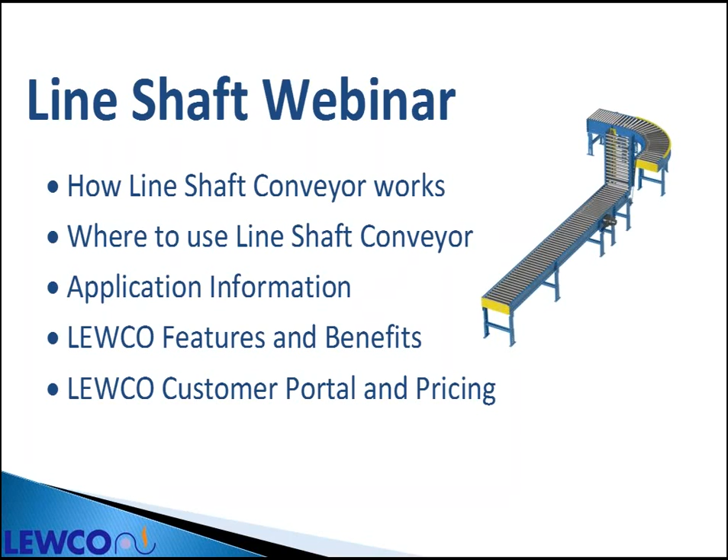During this presentation, we'll show you how line shaft conveyor works and where it performs best. We'll talk about where to apply it, and planning and pricing your conveyor layout. We'll introduce the LEWCO Line Shaft Conveyor modular design concepts. How line shaft conveyor works.

I know some of you are new to line shaft conveyor as a live roller conveyor, and some of you are grizzled veterans. I hope to keep you all entertained at least for the next 27 minutes. Most of you are not familiar with LEWCO's line shaft conveyor product line. By the end of this presentation, we hope you'll be able to discuss the basic concepts with your coworkers and with your customers. I'm going to review a few of the components in line shaft conveyor.

These are the basic components you'd see in every line shaft conveyor. When I say line shaft conveyor, what I'm referring to is a powered roller conveyor that has a shaft running underneath, right here, near one side channel, and it runs parallel with the direction of travel.

Each of the carrying rollers on top are characterized by having one or two grooves in them in order for the drive belts to power each roller individually from the rotating line shaft. The drive belts are held in place below the rollers by the drive spools and the collars, and I'll show you that in the next video. Of course, with any powered roller conveyor, we need a conveyor frame to support the rollers and a drive to power the rollers.

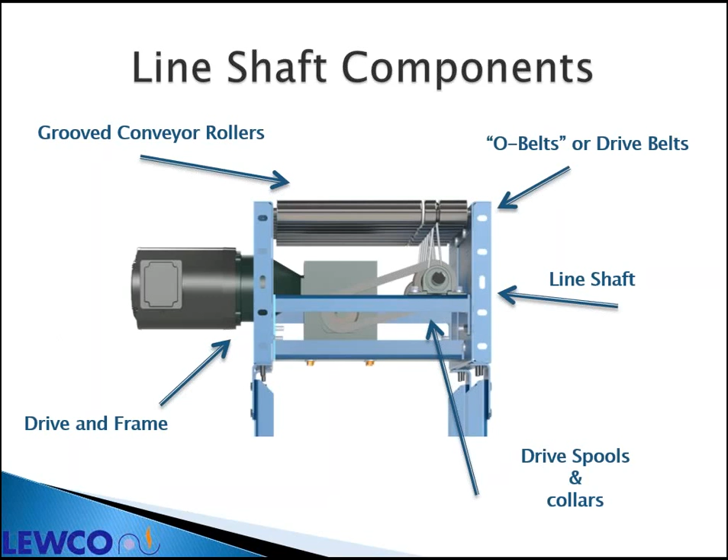Here's a video of the cross section we just reviewed. Here's our conveyor frame - you can't see the drive in this particular case, but the conveyor roller with the groove in it, this is our polyurethane drive belt. The blue component is the spool. The black component you can barely see is what we call the collar that holds the spool in place. And the shaft, of course, is located right there.

I'm going to start this up for a minute, and you can see that all five of those components are turning as soon as it starts. There we go - you can see they're all turning.

Now what I've done is grabbed hold of the roller to give you an example of one of the unique features of line shaft conveyor. When I start the video again, you'll see that the roller is stopped, the belt is stopped, the blue spool has stopped, but the shaft and the collar are still rotating.

The advantage to line shaft conveyor is that you can stop rollers, certain sections of rollers, using devices like pneumatic brakes, and still keep the motor turning and operating. So some products can move and some cannot move. You can see it's stopped, and now the blue spool is turning and the belt is turning. Repeating again, you can see how those work - the shaft is turning, and that's what drives the roller.

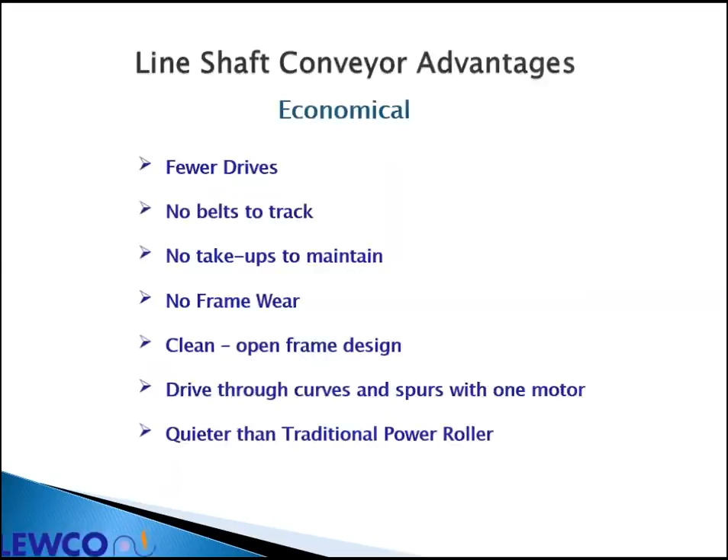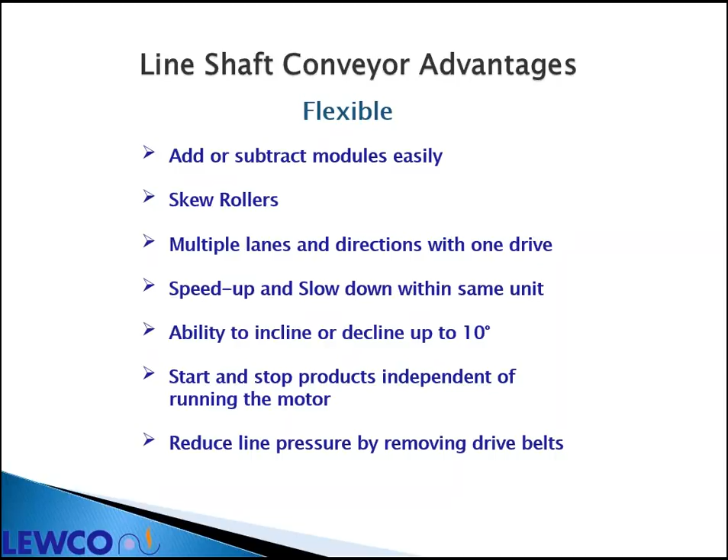I'm going to show you a video of a line shaft conveyor that's running, or it will be running in a minute. One of the things I wanted to point out is line shaft conveyor—and actually I'm going to do something here that I don't want you doing at home, but I'll get to that in a minute. You can see there's grooves on the rollers, and that's where the shaft is located below the rollers.

Each of the rollers is independently driven by a polyurethane drive belt. LEWCO's standard line shaft location is on the left-hand side of the conveyor. In this particular application, the customer needed a right-hand side line shaft because of the direction of the transfer at the end. I'll get to that in a minute.

What I'm going to do is start the video, and I'm going to show you that line shaft conveyor is safe, especially when compared to the positive drive of chains or belts. The friction style drive between the shaft and the roller allows the rollers to stop turning when enough pressure is introduced on the rollers.

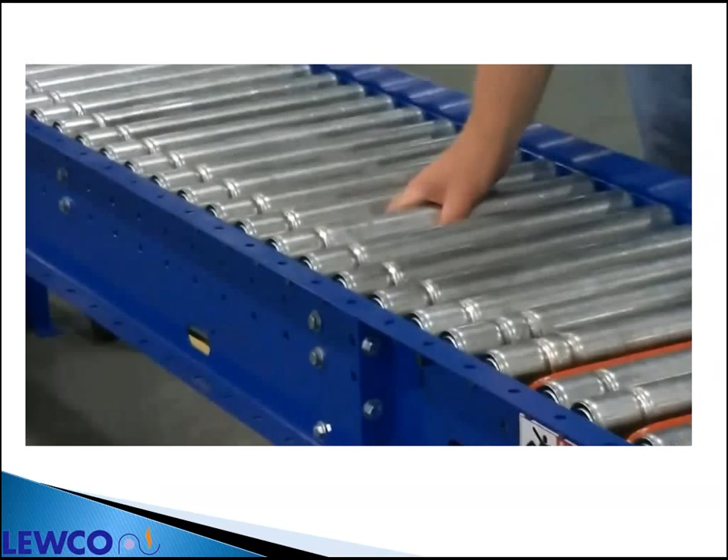Let me get the video started here for a second. So when you grab a hold of a roller, it's safe. There's no moving parts below the roller that you can get your hand caught in. I wouldn't recommend doing this at home, just demonstrating that it's safe. Again, putting my hand where the drive belts are, it's not a comfortable situation, but it doesn't hurt. So you can use this conveyor where people are working next to it without risk.

I'm going to pause this for a second and talk about the belt transfer. LEWCO's line shaft belt transfer, designated by the orange belt, is slave driven from the main line shaft. The belts go in the same direction as the rotation of the shaft.

The design of our transfers is such that you can order it so that it goes in the opposite direction without additional cost—all we have to do is specify it. In this case, it's going to be going in the same direction. The transfer belts stay the same length; they're not stretched in the movement of the transfer, thus keeping the life of our belts significantly increased over competitors' designs because of that.

Our standard transfers have 4 belts in them on 6-inch centers. As you can see, maybe it's hard to see in the video, but those belts are traveling at 1.5 times the speed of the conveyor rollers. And that's, again, our standard design.

We have John lower the transfer down. It's a pneumatically raised and lowered device. Generally, it comes with a solenoid-operated air valve in order to make it go up and down.

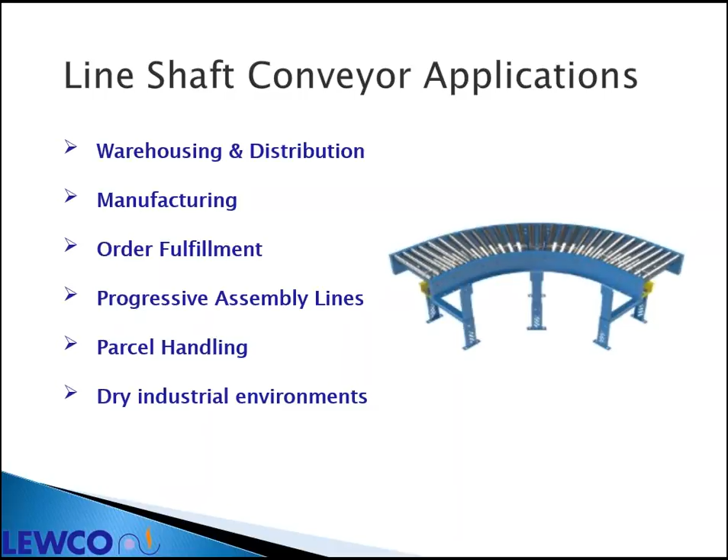The best application is a dry industrial environment. Although we do have line shaft conveyors installed in wet environments, and we've got them in dirty environments, don't want to restrict that. These are ideal applications. Any applications you want to consider outside of that environment, get a hold of LEWCO's application engineers and we'll be happy to help.

Speaking of applications, what are the ideal line shaft conveyor applications? Something where we're handling a flat bottom product that weighs between 5 and 75 pounds. Corrugated boxes or flats or totes, trays, and other flat bottom products, case goods are perfect candidates for line shaft conveyor, between the range of 5 pounds and 75 pounds.

We have the ability to handle more or less than that. We just want to discuss the application with you before you proceed discussing it with your customer.

LEWCO's standard line shaft conveyor widths range from 13 inches between the frame to 39 inches between the frame. Again, we can go narrower with special considerations and wider with enhanced drive capacity and larger diameter rollers.

As with any powered roller conveyor, ideally you want to have 3 powered rollers under the smallest product. That's going to provide you with the highest level of success.

Additionally, line shaft conveyor is a low pressure accumulation. I discussed that a little while ago. The forward force of the rollers generates low pressure of products accumulated on the conveyor. That's standard. By adding brake zones and photo sensors, we can make the line shaft conveyor have zero pressure, non-contact accumulation. It's a zone-based system, meaning we break the conveyor up into zones longer than your longest product and allow those zones to start and stop through the logic in the sensors.

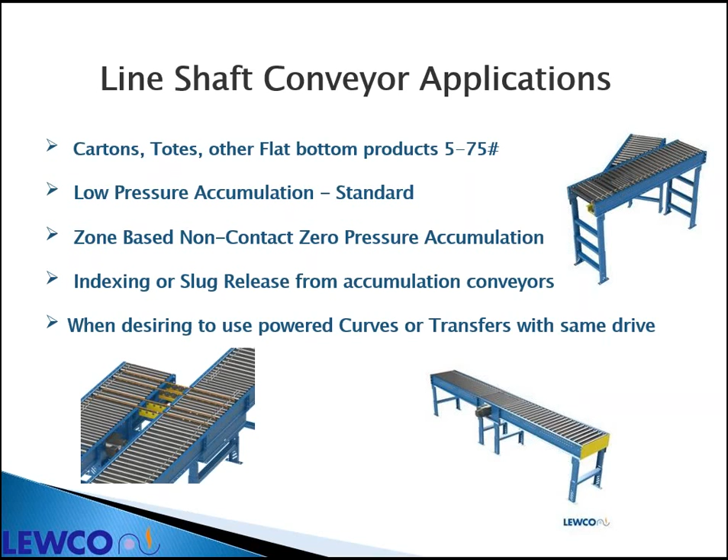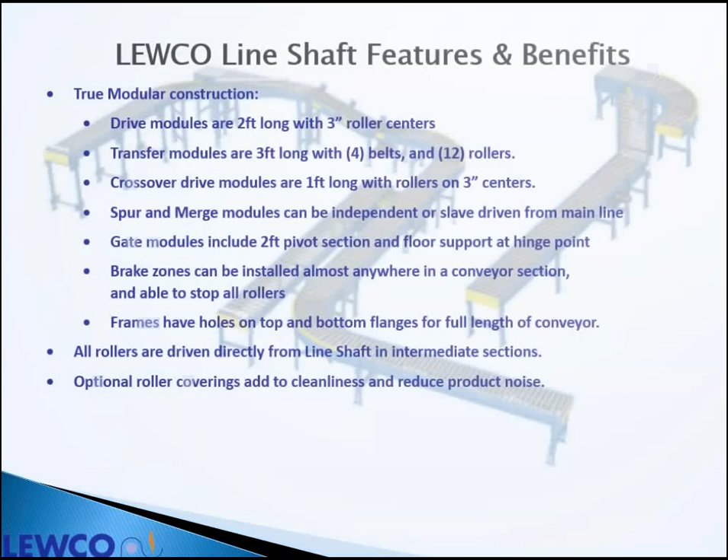I've talked about line shaft conveyor and its construction. Now I want to talk about why you would want to use LEWCO line shaft conveyor. One of the basic paradigms within LEWCO line shaft conveyor is we chose to use a modular construction style of line shaft conveyor.

All of our components are modular. We start out with a drive module. All of our drives are 2 foot long and the rollers are on 3-inch centers, regardless of the centers in the rest of the main conveyor. This allows us to make one style of drive, keeps our costs economical and competitive with other line shaft conveyor and belt powered roller manufacturers.

Our transfer modules are 3 foot long. The standard module, if you pick it, is 3 foot long and has 4 belts and 12 rollers in it, effectively resulting in 3-inch roller centers. Our crossover drive modules, which we haven't talked about yet, we'll get to in a minute, are 1 foot long and the rollers are on 3-inch centers.

The intent of a crossover module is to get the line shaft from one side of the conveyor to the other. Spur and merge modules can be independent or they can be slave driven from the main line. Our gate modules include a 2 foot pivot section and a floor support at the hinge point. You can kind of see one of those right up here. Our brake zones can be installed almost anywhere in our conveyor sections and are able to stop all the rollers in an intermediate section of conveyor.

LEWCO's line shaft conveyor frames are designed to be flexible in your installation. We've got holes on the top and bottom flanges full length on both sides, with additional crossmember holes for mounting devices such as brakes or stops in the conveyor frame itself. This allows you to modify and add devices, supporting them off of the conveyor frame because the holes are already there.

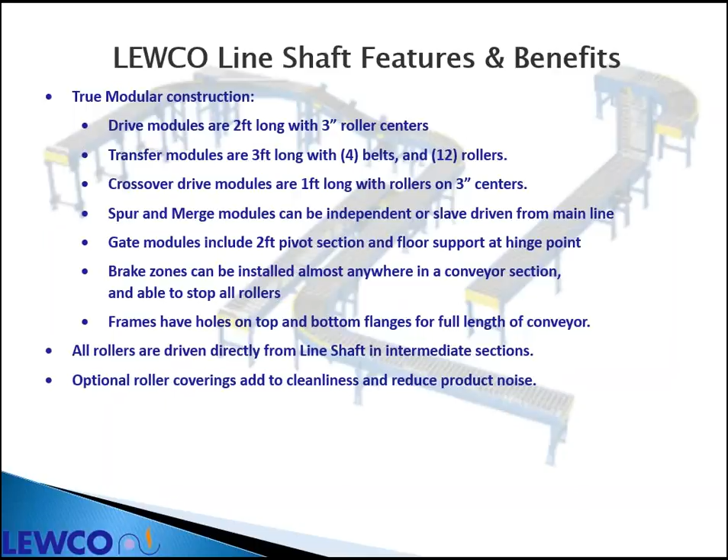I described briefly the components and modules that the LEWCO conveyor has. I'm going to give you a visual of each one, a brief visual of each.

This is our standard drive module. It's 2 foot long. The conveyor frame is 12 inches deep, and the rollers are a 1/4 inch above the top of the frame. That's the limiting factor on our line shaft conveyor. We don't have multiple various drives, just one standard 2 foot long drive module. The rollers are on 3-inch centers, with safety axles between the rollers.

Another good feature of LEWCO's line shaft drive module is you have access to the drive components from the top of the conveyor. You can stand along the conveyor and take the rollers off if you're a maintenance person, and you've got access to the drive if you need to do adjustment, changing, or lubrication. Those are standard maintenance requirements on all power roller conveyor, but it's easy because you've got access from the top of the conveyor.

Another key component in line shaft conveyor is the tapered roller curve module. There's a shaft that runs below the rollers, just like a regular line shaft conveyor. In a 90-degree example you can't see it here. They're connected with 4 U-joints, allowing the shaft to rotate and continue to drive all the rollers around the curve. LEWCO's line shaft curves come with 20 tapered rollers as standard. The rollers are tapered to help your product navigate the curve.

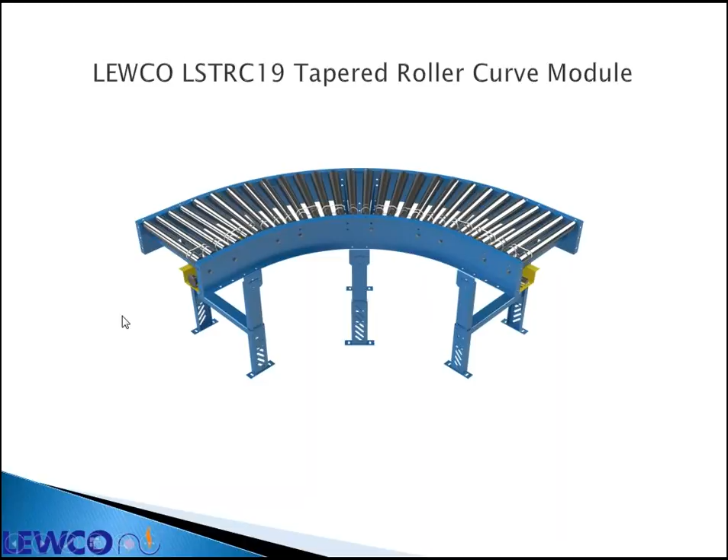When you think about LEWCO line shaft conveyor, consider the location of the shaft relative to the direction of travel. LEWCO's standard construction is a shaft on the left-hand side. In this curve, if the direction of travel goes this way, it's a left-hand shaft because as you follow the box down the conveyor, the shaft is on your left-hand side. The same conveyor could be a right-hand curve - we just have to identify it that way, and we twist the belts properly to work in your application. A right-hand curve is where the product comes in this way and exits that side, with the shaft on the right-hand side of the conveyor.

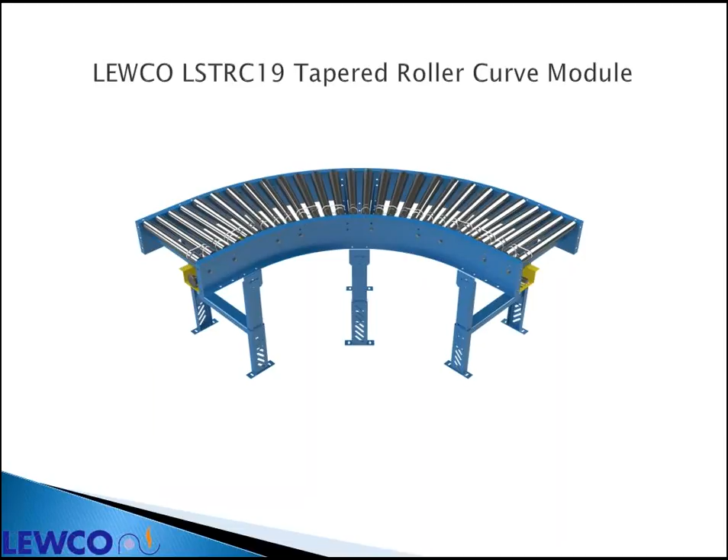Again, the tapered rollers in the curve help your boxes navigate around it. Our standard radius is 32.5 inches to the inside, up to 31 inches between the frame. If we're over 31 inches between the frame, we add more rollers, and our inside radius increases to 48 inches. All these specifications are downloadable from our website, and I'll show you that in a few minutes.

Another benefit of line shaft conveyor is a transfer module. In this case, it's the LEWCO Line Shaft Round Belt Transfer Module - 19 indicates 1.9 diameter rollers. There are 3 different standard styles. The first primary style is what we saw in the video: an internal belt transfer where the belts stay completely within the frame of the conveyor. We also have an external belt transfer module where the belts extend out 6 inches beyond the side of the frame, for narrower or smaller products, or to interface with a particular component where you need the belts extended beyond the side of the conveyor frame.

We also offer as standard a line shaft round belt transfer crossover style, meaning one single transfer moves product from one lane to the other. In this case, this transfer is slave driven from here - product flows in and transfers across, all driven with one motor. The other side could be driven with that same motor with the addition of an optional crossover module, not shown, or with a separate motor, with that line shaft driving the rollers in that section of conveyor.

All of our transfer modules are 3 foot long. All of our standard transfer modules have belts on 6-inch centers. Our standard transfer module is 12 inches deep, matching our drive depth, and the rollers are a quarter inch above the frame. The transfer belts raise up to a half inch above the top of the rollers, and the transfer belts drive at 1.5 times the speed of the main conveyor.

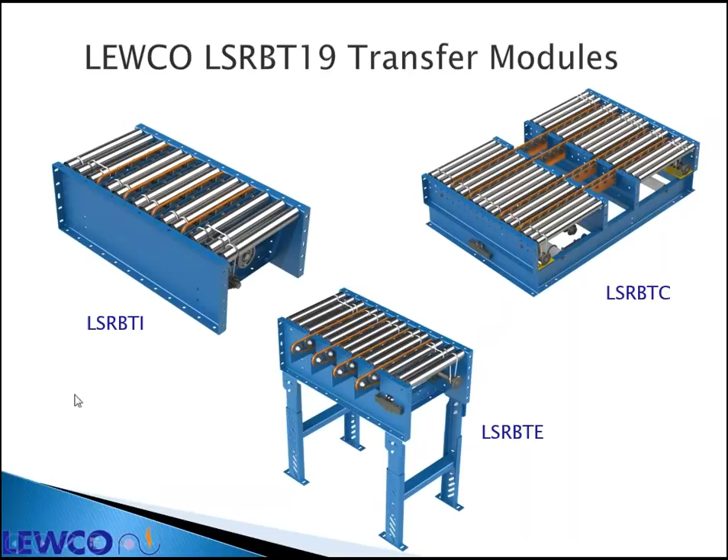Spur modules or merge modules. In this case, for LEWCO's line shaft conveyor terminology, our spurs are 30 degrees, and it's when you're diverting a product off of the main line. We'll call this piece of conveyor here the main line. This is the spur module. The main line is driven with its own motor, and it can slave drive the spur module, or the spur module can be slave driven by an upstream motor.

In order to complete this transition, you need an optional device, which isn't shown here, whether it's a pop-up wheel diverter, a power face diverter, or a flat face diverter. We don't necessarily need power face in order to get those products off at 30 degrees. These we generally require, and when applying these in your layouts, we'd like to have our application engineers assist you with the layout and make sure you have the right components in there.

When you need to bring two lines together, our merge module merges products at 45 degrees. Again, this merge module can be driven by the conveyor upstream, or it can be slave driven from the main line conveyor. There's either an optional guardrail or turning wheel that goes on here, and traffic control is something that needs to be included when you have a merge module where both lines are running at the same time. Our application engineering department will be happy to assist in those applications.

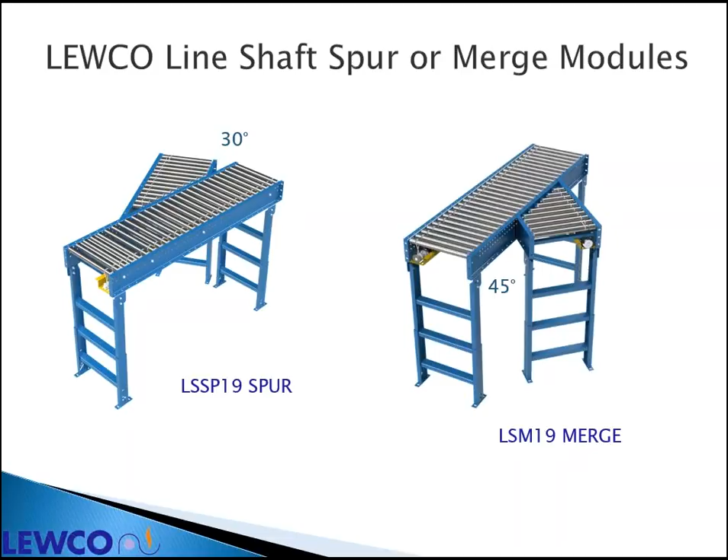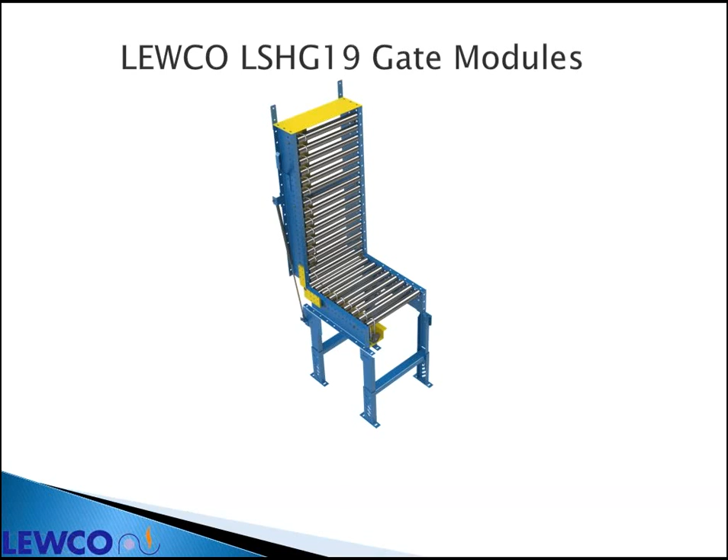Okay, I'm going to review. We're going to go through a price example and actually use this customer sales portal in order to come up with a price on our conveyor.

First things first, when you want to come into the portal to get pricing, you need to have a layout. You have to have some kind of sketch, some kind of basis, so you know where your conveyor is going to go.

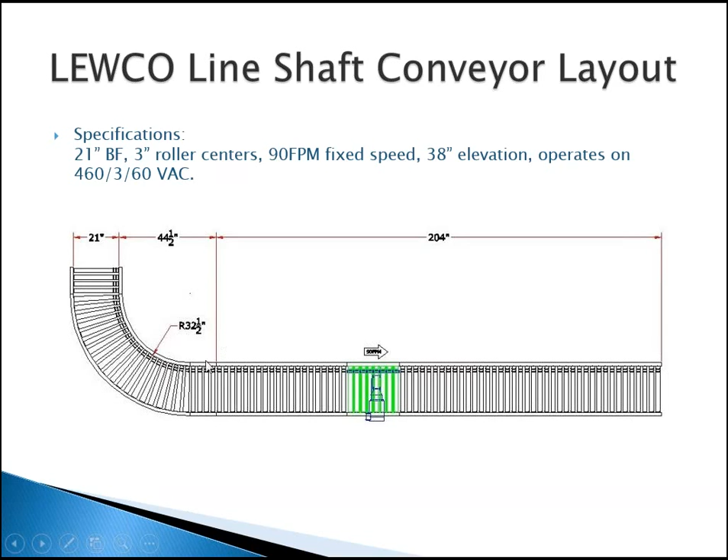So here we go. Whoops, that's not the one I wanted. There we go. I want to get over here and bring this over.

I am hoping that today it works and you can all see our customer portal login. I'm going to work on a quote on behalf of LEWCO Conveyors.

I'm going to generate a new quotation. In this case, I'm going to pick the items that I want to have. All of LEWCO's standard components are available in our sales portal for those who have access. In this case, we'll pick a line shaft conveyor and click Configure. What's going to pop up is a step-by-step process of going through the modules in line shaft conveyor. The drop-down box here shows LEWCO standard modules.

How we're going to proceed with this unit is we're going to do the curved line shaft first, and then we're going to do the straight line shaft conveyor second. I'll get to that at the end, why it's a better way to do that.

We picked our line shaft curve module. Our customer had requested 21-inch BF, if you remember, and the degree was 90 degrees. All of the items that are phantomed out are standard construction.

Our standard construction is precision grease pack bearings in our rollers, and galvanized steel rollers. Options are available, but not in the configurator. Our standard construction is 15 pounds per roller.

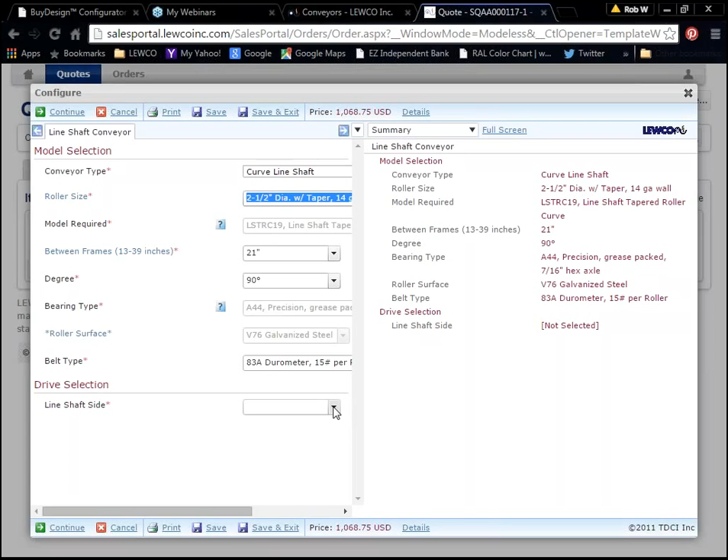If you recall, and I wish I had the little image up here, but I don't, the line shaft in this case was on the left-hand side, because we were being the box, going around the curve, and a left-hand curve. Customer had requested 90 feet a minute, so we'll make it go 90 feet a minute.

Now, LEWCO's line shaft price module includes, and this is important, the horsepower requirement. What you'll be able to do is add the horsepower requirements up for your components to make sure you have enough drive to meet the needs of the conveyor. In this case, it's a little over a quarter horsepower because we're going 90 feet a minute.

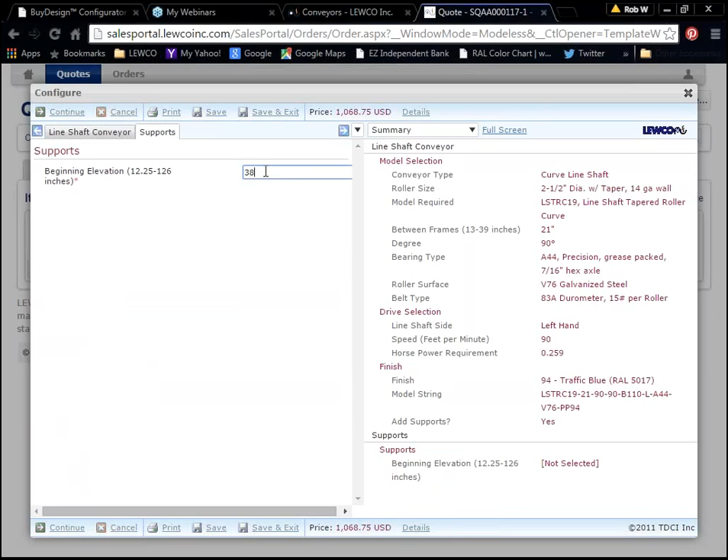We might as well add supports. It makes life easy to do it here rather than separate, and I don't have enough time to do it separate. So they asked for 38-inch elevation. LEWCO's standard configuration will get you a level conveyor, so the default ending elevation matches your in-feed elevation.

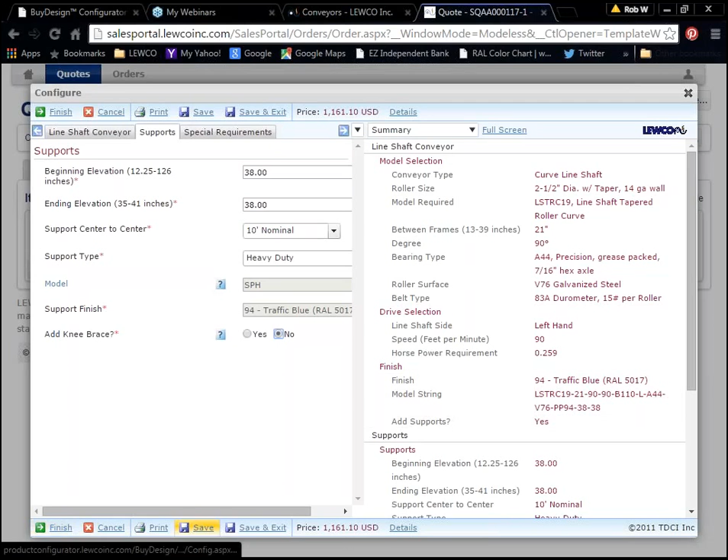At LEWCO Conveyors, we only use heavy-duty supports to support all of our powered conveyors. Now we've got it done. Right now, we've got a complete curve module listed over here. The model string is listed over here. We'll finish that, and we can see the price right there. Now we've got our curve module.

In order to get our straight piece of conveyor, we'll configure another component. In this case, we'll go with straight line shaft conveyor. Zone accumulation - in this case, we didn't have zone accumulation.

1.9 16-gauge roller is our standard. We wanted 21-inch between frame, and the rollers were on 3-inch centers. If you remember, the conveyor length was 204 inches, at least I remember, and that gives us a length of 17 feet.

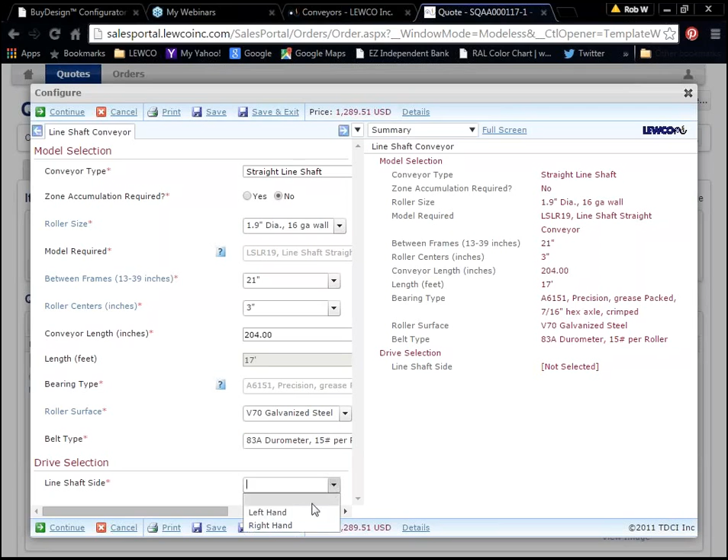Galvanized steel roller is our standard. Standard drive belt is 15 pounds per roller. Line shaft is on the left-hand side. Now realize it doesn't change the price if it's left-hand or right-hand.

It just defines the model string for when the conveyor becomes an order. That's the purpose of that. If you need to change that afterwards, you can, and the price won't change. As you can see, the horsepower requirement for the 17 feet of conveyor was 0.367.

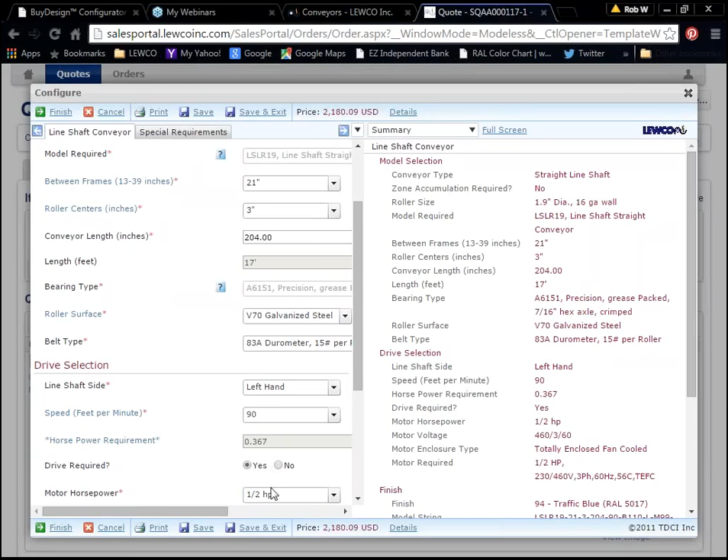If we remember to add the 0.259 horsepower from the curve to this, and we should remember to do that because it becomes important, we'll need to upgrade our horsepower from half horsepower to 3/4.

Customer had asked for a 3-phase motor. Totally enclosed fan cooled is our standard construction. There are options: energy efficient, inverter duty, and in the rare occasion we need a power-off brake.

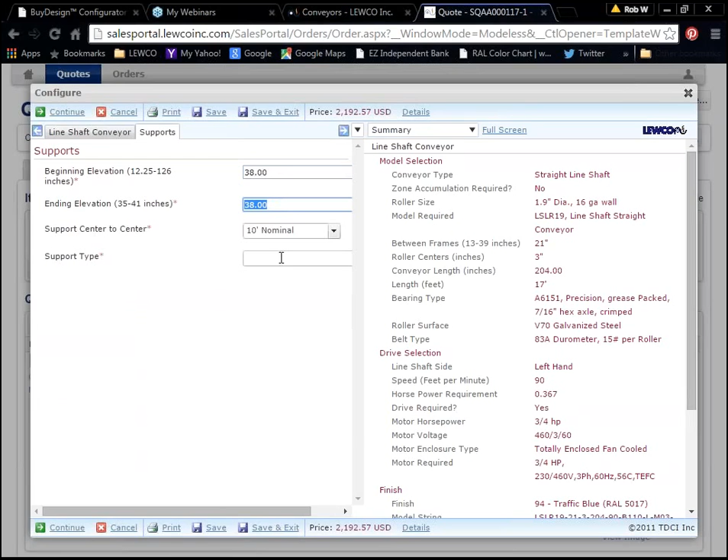Standard blue conveyor. We might as well add our supports to this module. 38-inch elevation, 10-foot nominal. There's no reason to put supports any closer than that. Again, at LEWCO Conveyors, our powered conveyors are supported by heavy-duty supports.

Now we'll finish this component, and by putting these two prices together, we'll have our complete line shaft conveyor unit. There are options you can add in the future: guardrail, end stops, the motor controls. Those can all be added later.